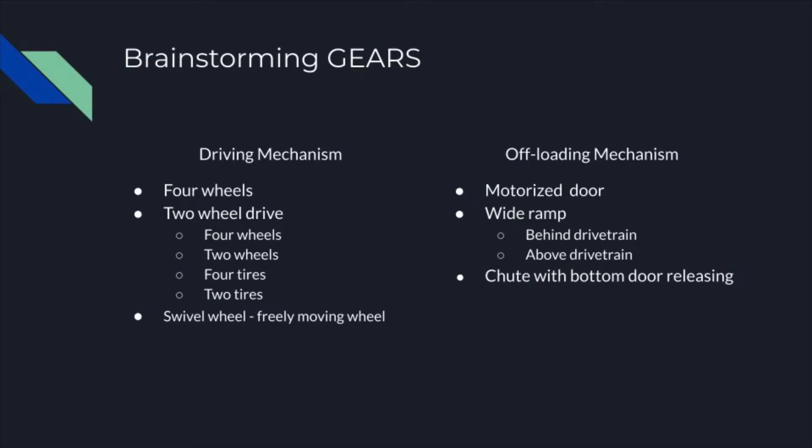The team was tasked to make 4 symbols to represent what was encased within the cargo container. Initially, this task seemed simple until the fact that these symbols must be understood and not offend any potential cultures or groups of people that they are presented to.

The symbols must be able to represent emergency shelter, food and water, medical supplies, and fuel. These symbols should be original. For example, the Red Cross is already a universal symbol for medical aid, so it could not be used.

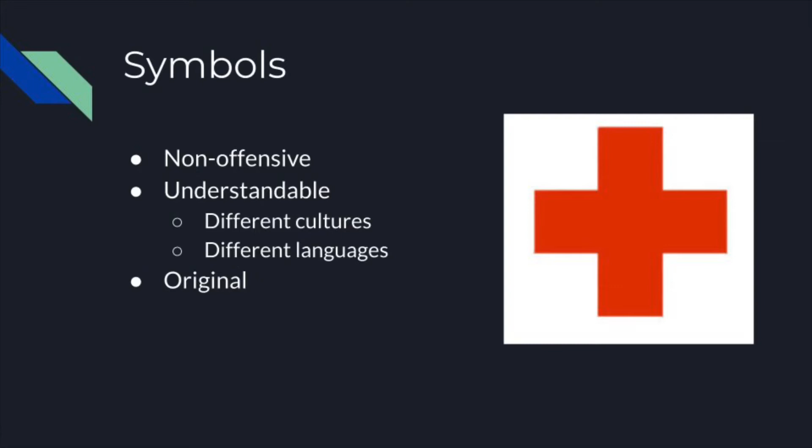Firstly, the team started by brainstorming ideas by using the method of rapid ideation, firing out any ideas that came to mind. Quickly, we came up with the list shown.

We would go on to do research to decide which symbol would be best understood throughout all cultures. For example, when researching the food symbol, we found that there is a strong correlation between the production or growth of a crop and the likelihood of finding it in the food there.

So we looked at the production maps of these foods and found that a lot of the foods were grown in multiple continents, but rice was an outstanding crop as it was grown in more countries than the rest of the foods. Additionally, many countries that rice is not commonly grown in still know what rice is and may even have it in their common dishes.

We followed a similar process with the other symbols as we looked at multiple countries as symbols for these demarcations. While emergency shelter and medical supplies were already deemed universally understood by the team through research, the decision for the fuel symbol was not as easy.

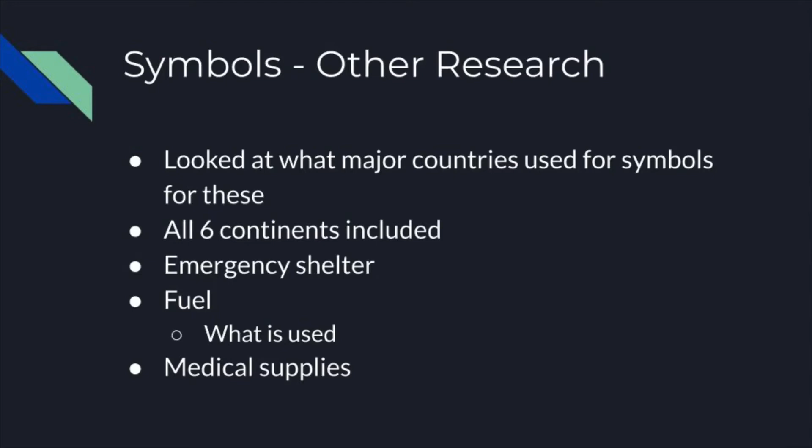Because fuel must encompass more than just gasoline, we decided to put more thought into the symbol. However, we figured that if someone was in need of oil or coal and saw the symbols of fire or gasoline, they would likely still open the cargo.

With these symbols, we sent a survey to many Purdue students with all diverse backgrounds and a diverse pool of cultures. We asked what these symbols represent, and the students would give their response via typing. With 53 responses, here are the results.

Just under 4% of people found the fuel symbol offensive, while all others were deemed completely non-offensive. 90.6% of the people could correctly decipher the emergency shelter symbol, 81.1% of people for the food and water, 100% for the medical supplies, and 88.7% for fuel.

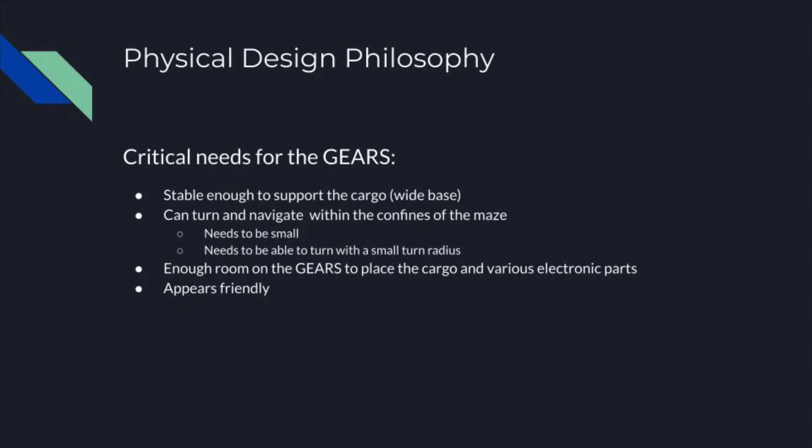When creating initial ideas for the gears, major needs for the physical design had to be created. These needs were that the gears had to be stable enough to support the cargo, and turn and navigate within the confines of the maze, meaning it needs to be small and able to turn within a small turn radius. It needs enough room to place the cargo and other electronic parts such as sensors, and it needs to appear friendly.

3 prototypes were created and tested in order to determine the best option. The first prototype was a large rectangular base with 4 wheels and 2 motors powering it. The wide base allowed for good support of the cargo and other attachments that were needed. However, it was found that the prototype struggled with making tight turns and was projected to be too large for the maze.

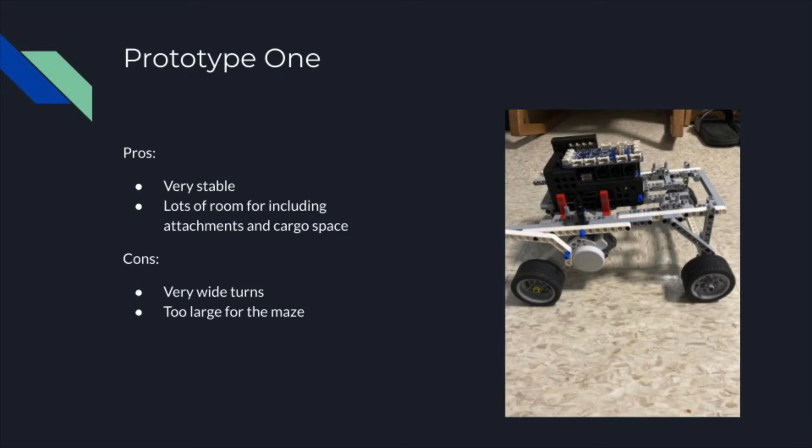The next prototype aimed at solving the turning problem by removing the back 2 wheels and implementing a peg leg, or simple Lego piece, that would support the weight of the gears. This design, while able to turn with a tighter turn radius than prototype 1, struggled with being stable enough for the cargo.

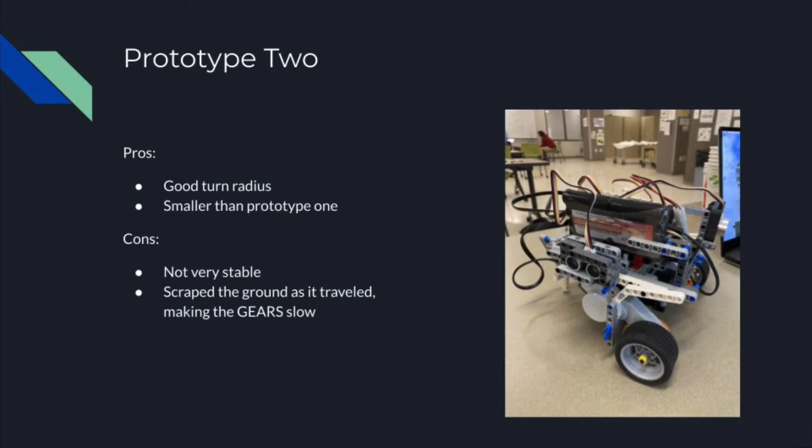The third prototype replaced the peg leg with a single rear wheel that can freely spin as the gears turned. This design proved to have the best turn radius out of all of the previous prototypes and improved the stability of the gears. However, it lacked room underneath the gears, which was needed for the cargo delivery system.

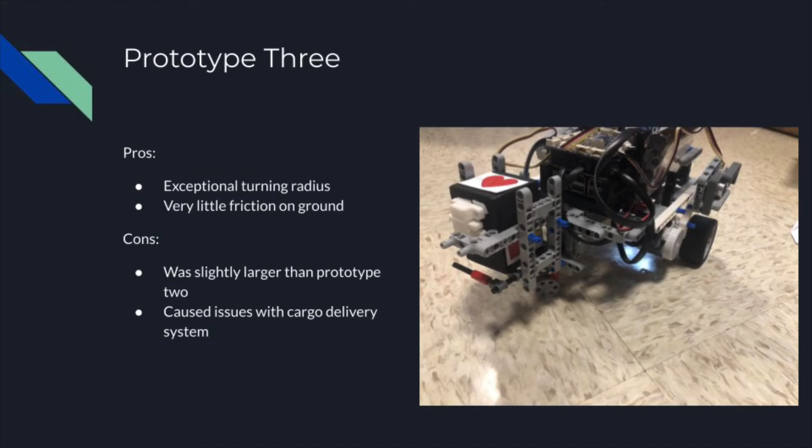In order to find which prototype seemed the most friendly, a survey sent out to the general public provided results that said the majority of people preferred the smaller form of prototype 2 and 3, rather than the large rectangular base of prototype 1. A subsequent question also asked what additions would make the gear seem more friendly, and the most common response was that the inclusion of a face would make people most comfortable.

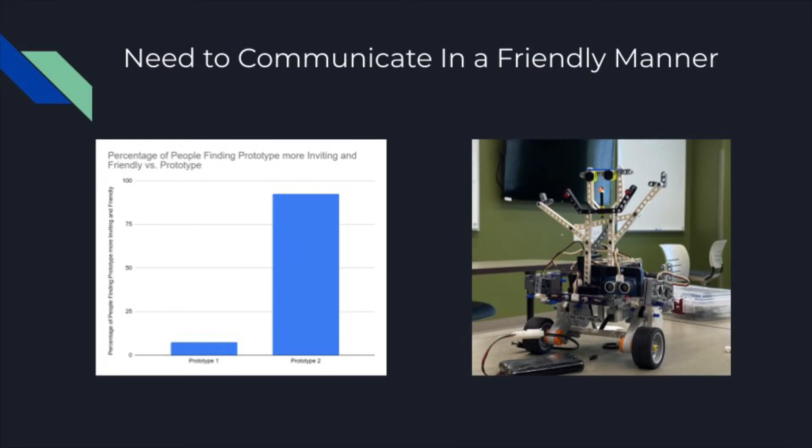So in the final design, a large smiley face was included. Following testing, a decision matrix was created, highlighting the different needs of the gears, and after completion, it was clear that the third prototype was the most effective design and would be utilized for further testing and development.

The first cargo drop-off system was to be mounted to the underside of the gears and would consist of a table that would slide in, causing the cargo container to fall off onto the ground. This design had a large flaw in that the cargo container was simply too large to fit on the table, leading to a necessary redesign.

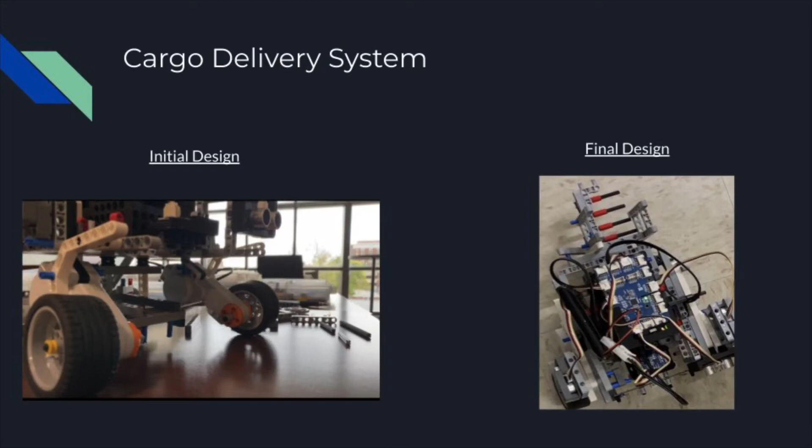The new design consisted of a system implemented on the rear of the gears, where the cargo would sit on top of a trapdoor and fall to the ground. This design was very reliable, however ended up causing the gears to be too large to make effective turns within the maze.

Now moving on to the software design philosophy. To start off, I'm going to go over the purpose of the sensors and the motors. Like we said earlier, the gears had ultrasonic, infrared, and IMU sensors. The ultrasonic sensors were used to detect the distance in front, to the right of, and to the left of the gears. The infrared was used to detect infrared hotspots in the close proximity of the gears in the maze.

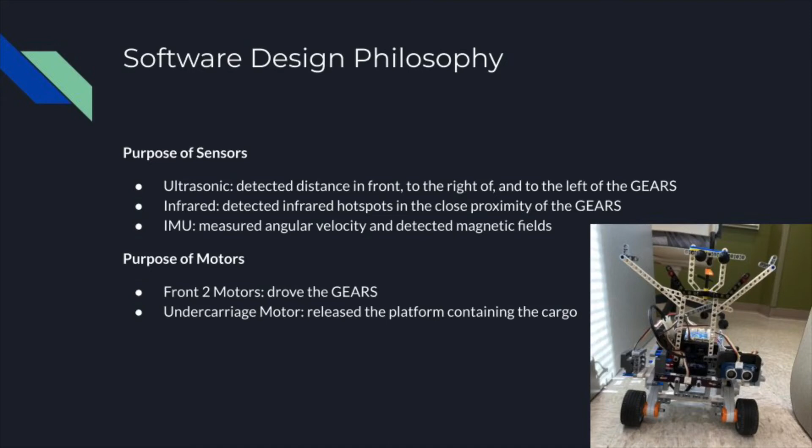And finally, the IMU was used to measure angular velocity as well as detect magnetic fields in the maze. For the motors, the front 2, as seen in the picture, were used to drive the gears, and we also had an undercarriage motor, not seen in the picture, that was used to release the cargo in the back.

Now moving on to distance determination code. Our ultrasonic sensors detected the forward, left, and right distances from the gears. We found that the gears was 22 centimeters wide, and the corridors were 40 centimeters wide, so we had 18 centimeters of space to work with. In order to keep the gears in the middle of the corridor, it would need 9 centimeters on the left and right of itself.

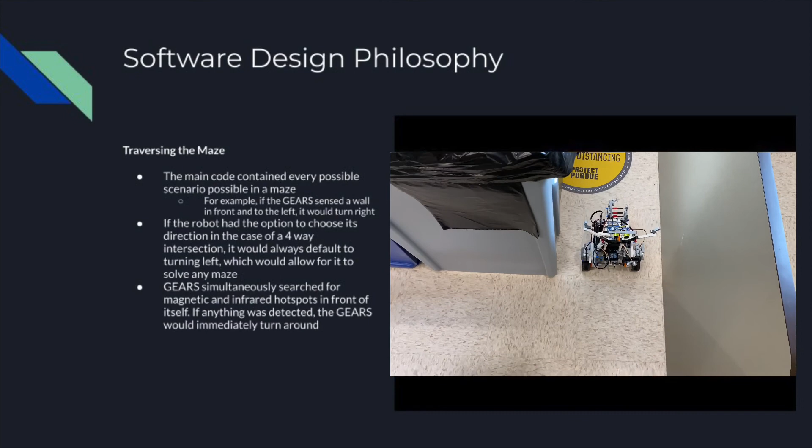Then it starts utilizing the feedback control as it is moving forwards. You can see that it's attempting to stay right in the middle of the corridor. While it was doing this, it also searched for magnetic and infrared hotspots using the infrared sensor and the IMU.

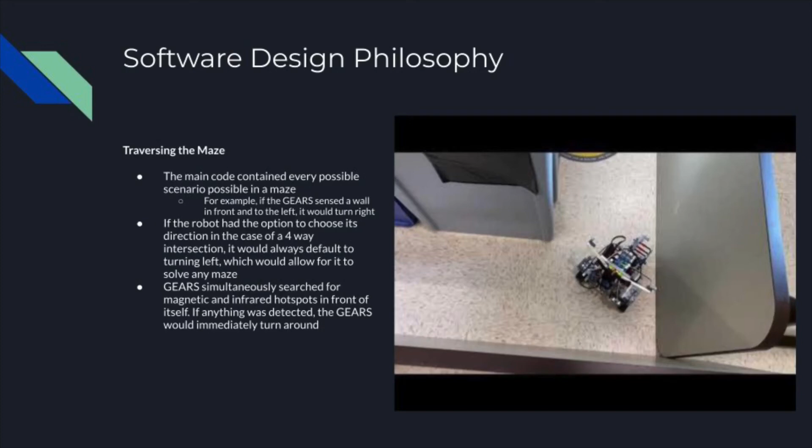If anything was detected, the gears would immediately turn around and head the other direction. Anytime the gears detected an infrared or magnetic hotspot, it would also add information to the hazard identification text file. The information added would be the type of hazard, the magnitude of the hazard parameter, as well as the location of the hazard on our map. This text file would be immediately accessible after the conclusion of the gears' voyage.

To successfully map any hallway that the gears came across, a program was implemented that could add the full length of a hallway when finding it at an intersection. To do this, several important data points had to be kept track of, including the direction the gears is facing, as well as the current location within a coordinate system that the gears is at upon reaching an intersection.

Using this information, a while loop created the line of ones to extend the length of the hallways in the 10 by 10 array using NumPy. This matrix was then outputted at the end to show the completed map.

The current location function was vital for the gears to successfully create an array within the map of the maze. This function utilized the information on the initial length of the hallway it turned down that was found prior, and then uses the remaining distance of the hallway to determine where in the hallway the gears is. Using this, the direction the gears is facing, as well as the previous known location, the program can successfully determine the new current location within the maze.

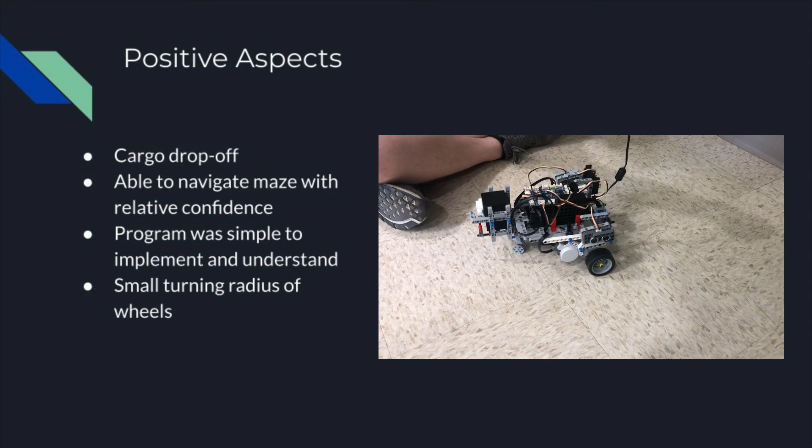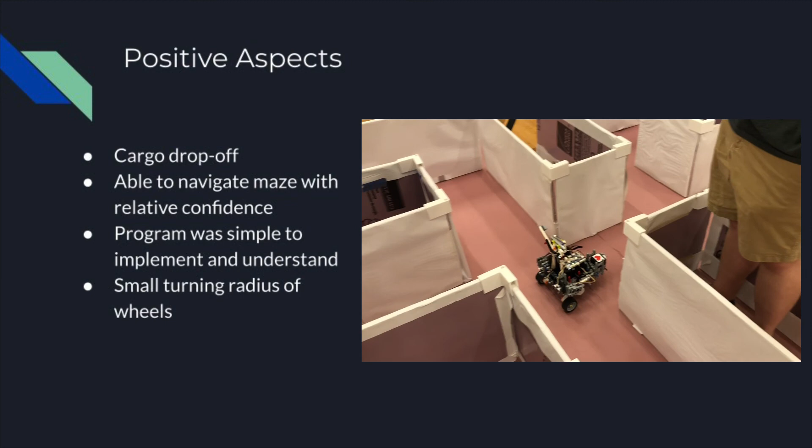One positive aspect of our design was the cargo drop-off. Through testing, we found that the drop-off was effective and consistent, as it always dropped off the cargo upright. As seen in the video, this is how the cargo was dropped off. Additionally, the gears is able to navigate the maze with relative confidence as seen in this video. Although the navigation was not perfect or consistent, we considered it a positive aspect within the design.

Next, the program was easy to implement and understand, so if another person or group were to improve the gears in the future, the process would run smoothly. Lastly, the turning radius or potential turning radius was small.

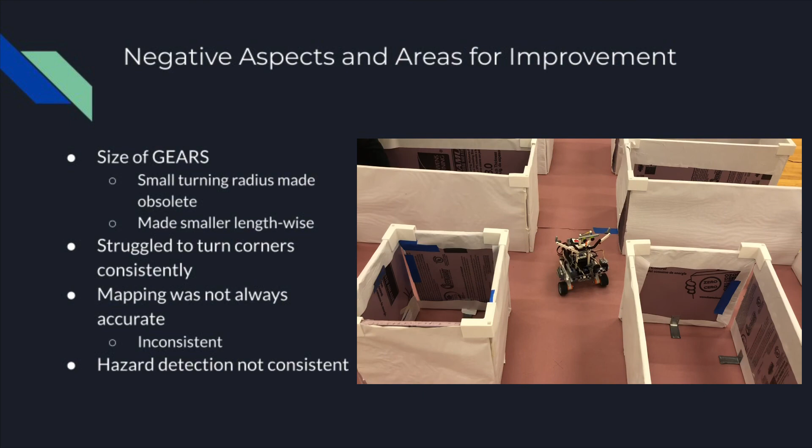However, one of the negative aspects of the gears design negated that. The size of the gears design, in particular the length, prohibited the gears from properly making 180-degree turns and sometimes 90-degree turns. Unrelated to its size, the programming implemented struggled to consistently have the gears turn as well. Additionally, mapping and hazard detection were not consistent, as sometimes the gears would not map the last hallway it went through, or a random hazard would be detected.

In conclusion, the gears was neither a success nor a complete failure. In theory, the gears should have been able to do all things it was asked, but more time and testing would be needed to perfect its software, as well as modifications to its hardware and size. This factor would be especially important when thinking about scaling up the gears. Because all features were already present within the gears design, we are confident that the design could be improved greatly in the future. Thank you.